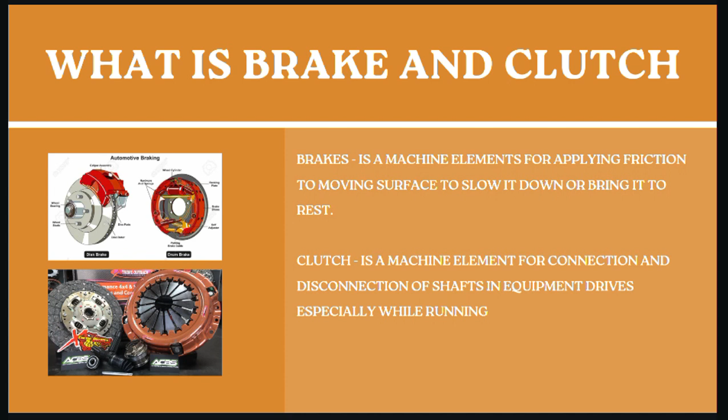Next, types of brakes. We have first mechanical brakes, including band brake, differential brake, block brake, brake shoe, disc brake, and spot brake. Then hydrodynamic brake, and lastly electric brake.

So what is band brake? Band brake uses a flexible band on a rotating drum to slow or to stop motion.

Next is differential brake. This brake allows control of left and right brakes, usually used in aircrafts.

Next is block brake. This brake is a type of friction brake that uses a brake shoe.

Next is disc brakes. From the word disc brakes, it uses a disc to stop the motion of the machines. Then next is hydrodynamic brake.

This brake uses the resistance of fluid to slow down the machines. So it uses a fluid to stop the machines.

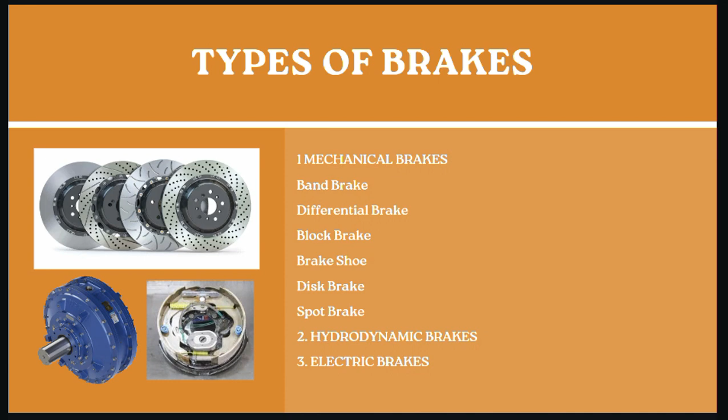Then next is electric brake. It uses electrical current or a magnetic force to slow down and to stop.

What is the advantage and disadvantage of using brakes? Advantages: simple in construction and maintenance, less expensive compared to hydraulic brake, and good for emergency and parking brakes. Disadvantages: wear and tear, heat buildup, and maintenance costs.

So the advantage of this is, of course, to stop or slow down the machines. And this is also a safety feature in case there's an accident or malfunction of a machine.

Then the disadvantage is wear and tear. This machine element has friction, that's why there's friction in brakes, and that's why there's wear and tear. So through time, the brake pads will wear down, so that needs a replacement.

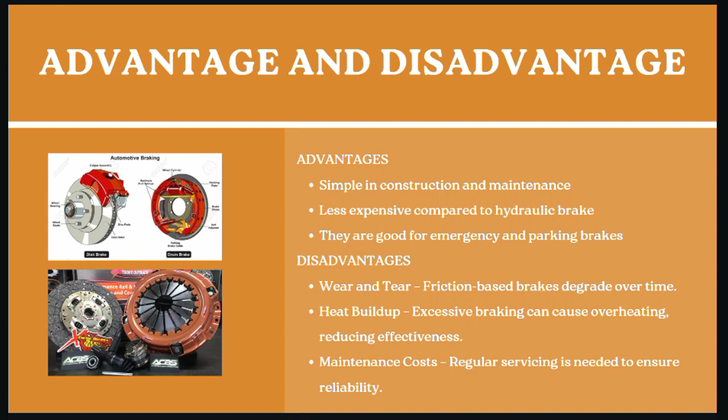So next is maintenance cost. Every brake has maintenance to ensure safety and to ensure also that it will work in case of emergency.

Types of clutches. First we have friction clutch, containing disc clutch, cone clutch, band clutch, block clutch, centrifugal clutch, and expanding ring clutch. Then next is jaw clutch, hydraulic clutch, and electromagnetic clutch.

First, disc clutch, cone clutch, band clutch, block clutch, and centrifugal clutch use friction to transmit or translate movement at a wheel.

So usually it depends on what component it is. For example, in disc clutch it uses a disc, and in cone clutch it uses conical shape clutches.

Then in block clutch, it uses interlocking blocks to transmit torque in a shaft.

Then the band clutch uses a flexible band to transmit torque in a shaft.

So next is centrifugal clutch. This clutch is a mechanical device used on driven rotary equipment, so usually it is used in combustion engines. So sometimes it uses centrifugal clutch.

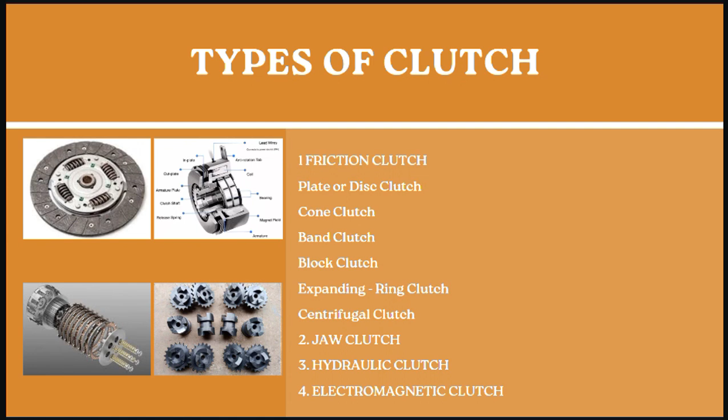Then next is electromagnetic clutch. Electromagnetic clutch uses electric current or electromagnetic force to function. So yeah, that's electromagnetic clutch.

What is the advantage and disadvantage? For the advantage: precise control over acceleration and power, better fuel efficiency compared to automatic transmission, and lower maintenance costs due to simpler mechanics. The disadvantage is it requires practice to operate smoothly, can be tiring in heavy traffic, and prone to wear if not used properly.

So using clutch has the advantage of precise control over acceleration. So using clutches, we can maximize the power of a machine.

And if properly used, the clutch can lower the maintenance cost and provide fuel efficiency compared to automatic transmission.

Then the disadvantage is it requires practice to operate smoothly, because using a manual gear is hard. You need proper balance of clutch and gas to accelerate the car smoothly.

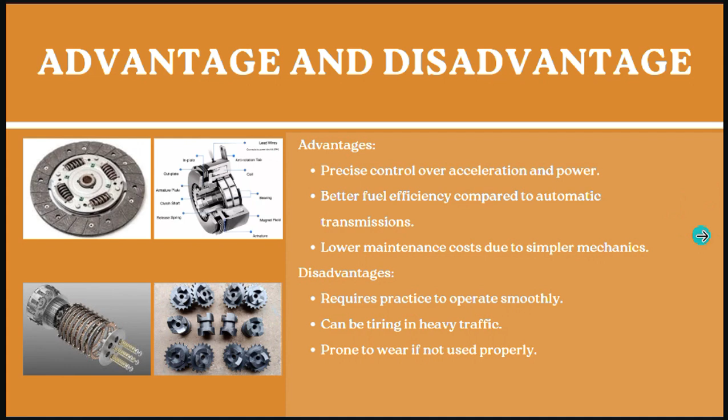Formula of clutch in plate or disc clutch. First is total torque in pressure disc. Torque equals number of pairs multiplied to coefficient of friction multiplied to applied force, then multiplied to frictional radius.

Then next is torque equals to number of pairs multiply to coefficient of friction multiply to applied force, then multiply to 2 over 3 times outside radius raised to 3 minus inside radius raised to 3, over outside radius raised to 2 minus inside radius raised to 2.

Then next is total applied force. Force equals to pi multiplied to pressure times outside radius squared minus inside radius squared.

Then next is total torque in wear disc. Torque equals to number of pairs multiplied to coefficient of friction times P max times outside radius raised to 2 minus inside radius squared, times inside radius.

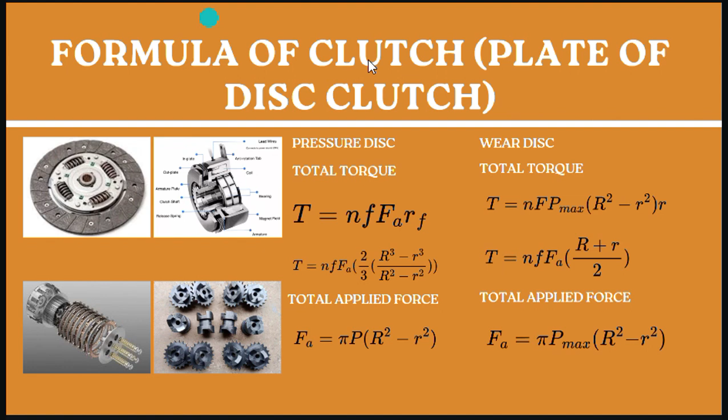Then next is cone clutch. First is torque transmitted. Torque equals to FA, or axial force, times coefficient of friction times friction radius over sine theta.

Next is axial force. FA equals to normal force times sine theta.

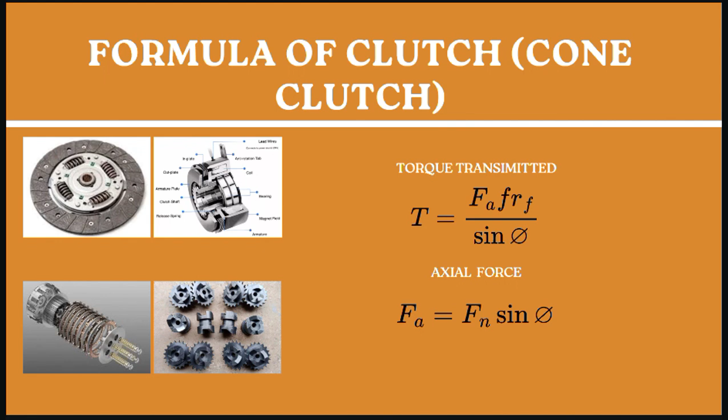So next is band clutch. First is torque transmitted. T equals to F1 minus F2 times D over 2. The D is the drum diameter and F is force.

The next is maximum normal pressure. P max equals to F1 over band width times radius.

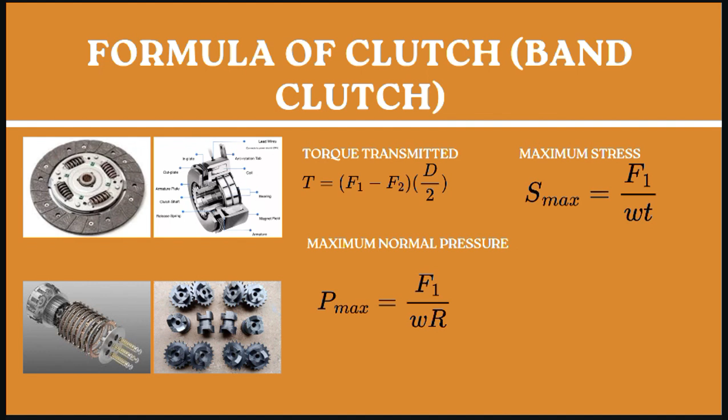Then next is maximum stress. S max equals to force over band width times band thickness.

So next, centrifugal clutch. First, torque transmitted. Torque equals 2 times number of identical weights times radius of friction times coefficient of friction times W, which is weight of each inertia, times radial distance or length times RPM raised to 2,

over 70,400 minus radial spring. Next is radial spring force on each inertial weight. So S equals to W, which is the weight, and L, which is the distance, times RPM raised to 2 over 70,400, cosine times pi over 4 minus pi over n.

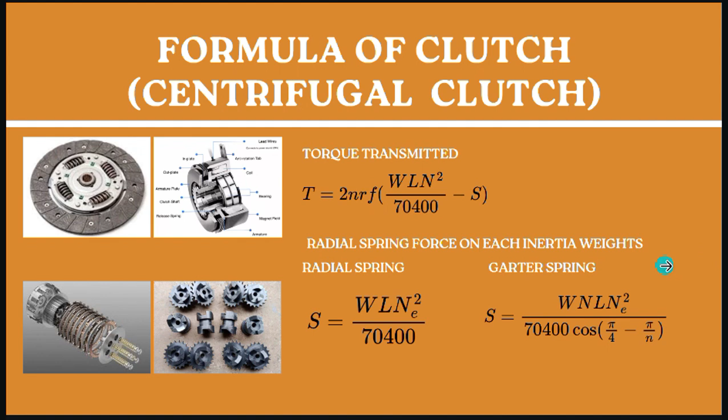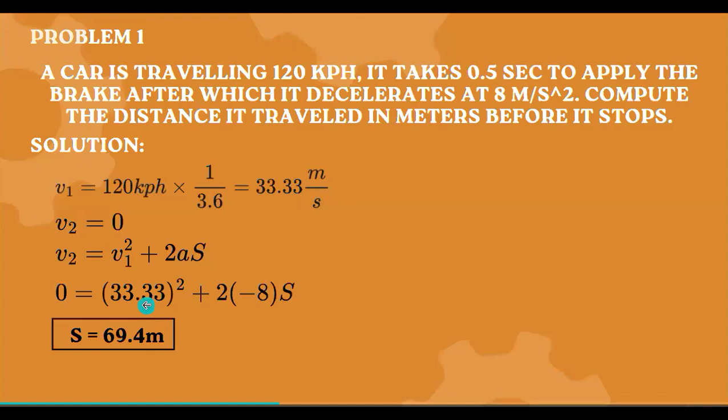We are here to solve problems of clutch and brakes. Problem number one.

A car is traveling 120 kph. It takes 0.5 seconds to apply the brake after which it decelerates at 8 meter per second squared. Compute the distance it traveled in meters before it stopped.

Initial speed equals 120 kph. We convert it to meter per second because we're looking for meters. 120 kph times 1 over 3.6 equals 33.33 meter per second.

Final speed equals to 0 because the car is stopped, and we use final speed squared equals initial speed squared plus 2 times acceleration times distance it traveled.

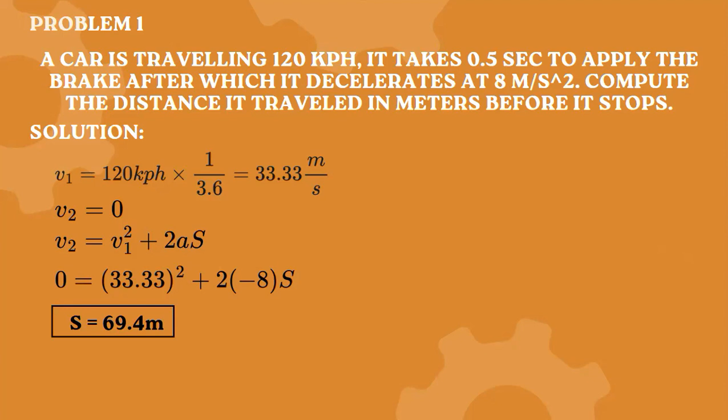Substitute the given: 0 equals 33.33 squared plus 2 times negative 8 times distance traveled. And the answer is 69.4.

Next one is problem number 2. A car is moving at 60 mph when the brakes are suddenly locked and the car begins to skid. If it takes 2 seconds to slow the car to 30 mph, how far will it have traveled in coming to stop?

Initial speed equals to 60 mph. We convert it to feet per second, which is 88 feet per second. And the final speed equals 30 mph equals 44 feet per second.

Acceleration equals final speed minus initial speed over time, equals 44 minus 88 over 2, equals negative 22 feet per second squared.

Again we use final speed squared equals initial speed squared plus 2 times acceleration times distance traveled. Substitute the given: 0 equals 88 squared plus 2 times negative 22 times distance traveled, equals 176 feet. Problem number 3.

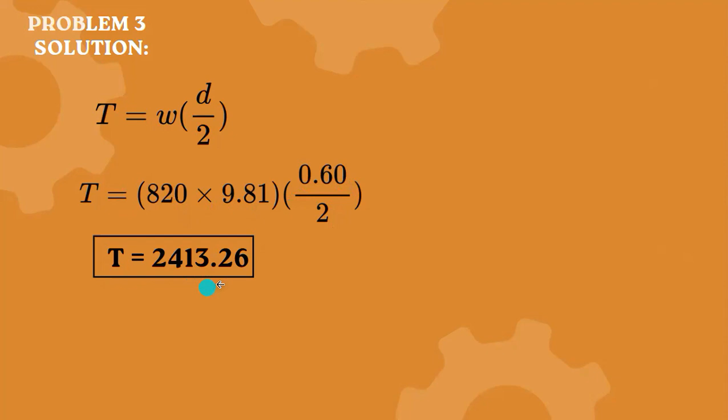We use T equals W times D over 2. T equals 820 times 9.81 times 0.60 over 2. And the torque is 2413.26. Next one, problem number 4.

A simple band brake has a 76 cm drum and fitted with a steel band 2/5 cm thick, lined with a brake lining having a coefficient of friction of 0.25. The arc of contact is 245 degrees and the drum is attached to a 60 cm hoisting drum that sustains a rope load of 820 kilogram. The operating force has a moment arm of 1.50 meters and the band is attached 12 cm from the pivot point. Compute the force required considering the direction of rotation is reversed.

We have the same given as problem number 3, but we're looking for the force required.

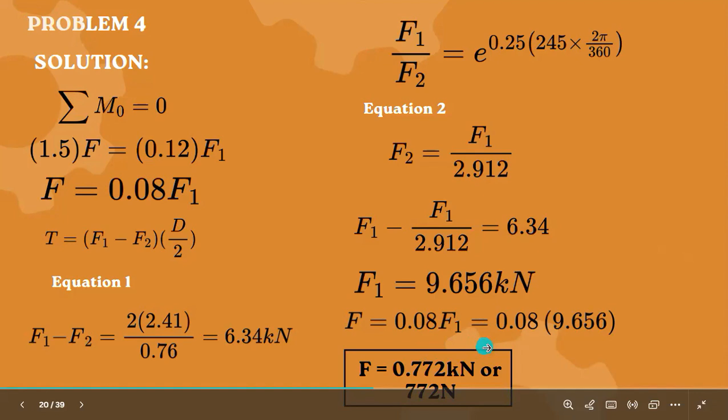And the next one, problem number 5. A simple band brake has a 760 mm drum fitted with a steel band 2/5 cm thick lined with a brake lining having a coefficient of friction of 0.25. The arc of contact is 245 degrees, and the drum is attached to a 600 mm hoisting drum that sustains a rope load of 820 kilogram. The operating force has a moment arm of 1.50 meters and the band is attached 120 mm from the pivot point. Compute the width of the steel band for a tensile stress of 55 MPa.

The solution is: stress equals F1 over Bt. B equals 9.656 times 10 raised to 3 over 55 times 4. The width of the steel band is equals to 43.89 mm.

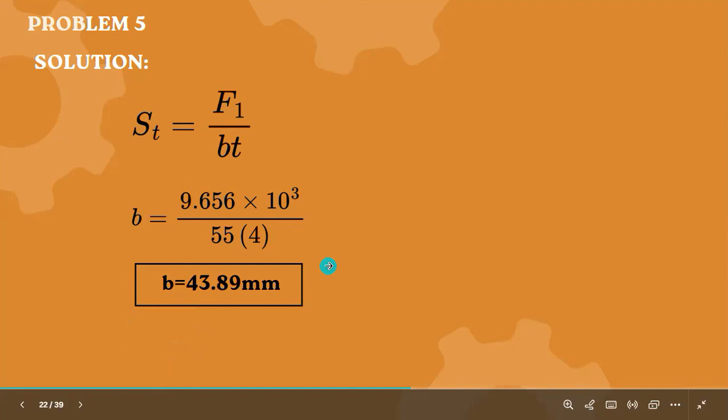We follow the problem of clutch. Problem number 1.

A disc clutch has 6 pairs of contacting friction surfaces. An axial force of 100 pounds acts on the clutch. The shaft speed is 400 RPM. How much horsepower can the clutch transmit if the frictional radius is 2 inches and the coefficient of friction is 0.30?

We solve for torque equals F times F times R times N. 0.30 times 100 times 2 times 6. The torque is 360 inch-pound.

And we solve for horsepower. Power equals 2 pi Tn, and we divide it by 33,000 to convert to horsepower. Power is equal to 2 pi times 360 over 12 times 400 over 33,000. The power is 2.28 horsepower.

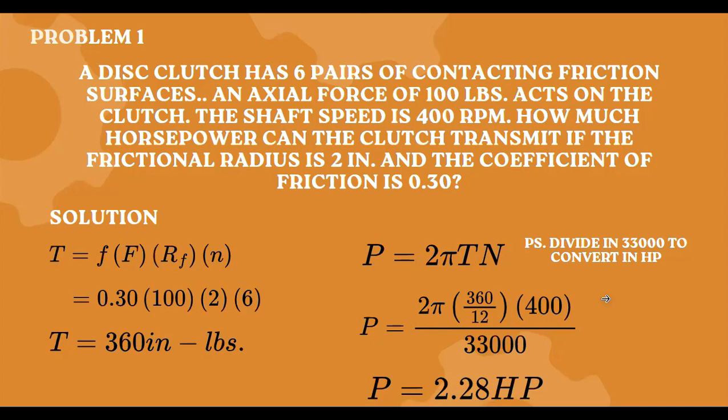Problem number 2. A truck develops 33.5 HP at 1000 RPM. The clutch used to transmit the aforementioned power is a single plate clutch with 2 pairs of contact surfaces. If the coefficient of friction is to be 0.40 and the mean diameter of the disc is to be 190 mm, and the average normal stress on the clutch lining is 120 kPa, compute the inside diameter.

So P equals 60 times P over 2 pi equals F times FA times RF times N. Equals to 0.4. RF equals dm over 2 equals 0.190 over 2 equals 0.095.

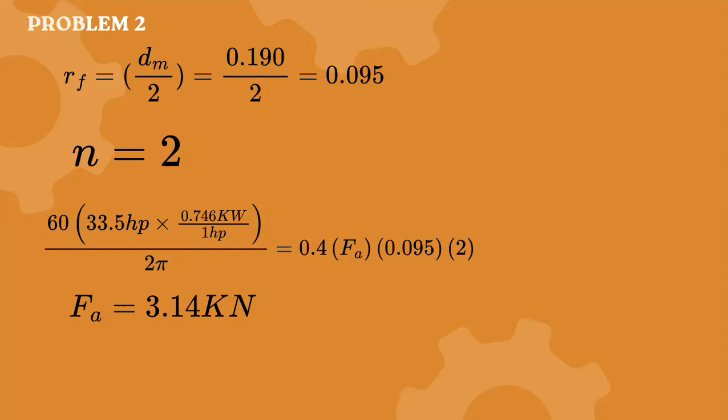N equals 2. And substitute the given: 60 times 33.5 HP times 0.746 kilowatts per 1 HP over 2 pi equals 0.4 times FA times 0.095 times 2 equals 3.14 kilonewton. Problem number 3.

A cone clutch has an angle of 10 degrees and a coefficient of friction of 0.42. Compute the axial force required if the capacity of the clutch is 7 kilowatts at 500 RPM. Note, the mean diameter of the active conical section is 300 mm.

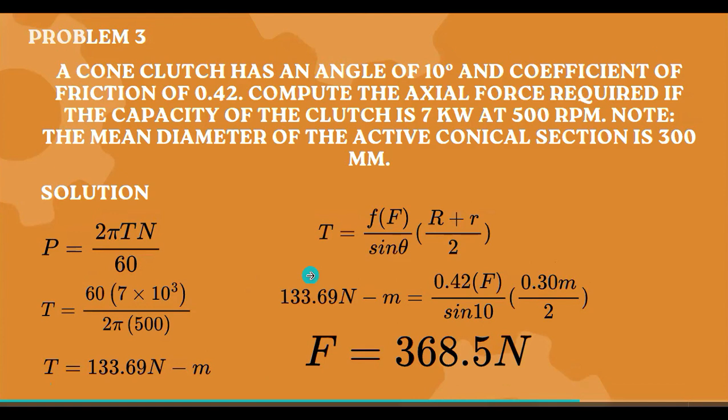Solution. Power equals 2 pi Tn over 60. Torque is equals to 60 times 7 times 10 raised to 3 over 2 pi times 500. Torque is equals to 133.69 Newton meter.

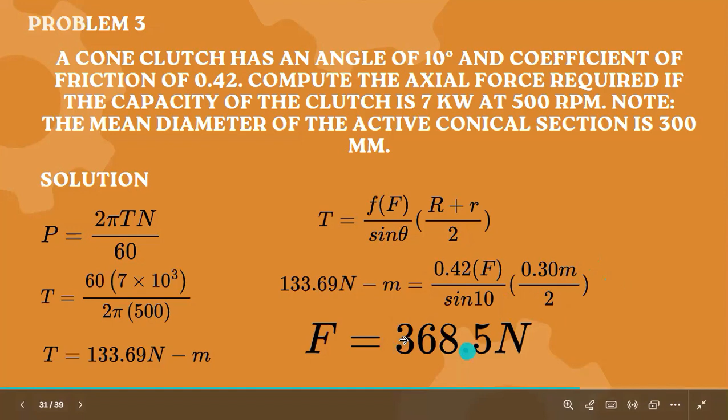And solving for axial force required: torque equals coefficient of friction times F over sine theta times R plus R over 2. 133.69 Newton meter equals 0.42 times F, which is the axial force, over sine 10 times 0.30 meters over 2, equals 368.5 Newton. This is the final answer for problem number 3.

How much torque can a cone clutch transmit if the angle of conical element is 10 degrees? The mean diameter of the conical clutch section is 200 mm and an axial force of 550 Newton is applied. Note, the coefficient of friction between the clutch elements is 0.45.

Solution. We use torque equals coefficient of friction times force over sine theta times R plus R over 2, meaning the radius. Rm equals dm over 2 equals 0.20 over 2 equals 0.10 meters. Torque is equals to 0.45 times 550 Newton over sine 10 times 0.10 meters equals 142.53 Newton meter. This is the final answer.

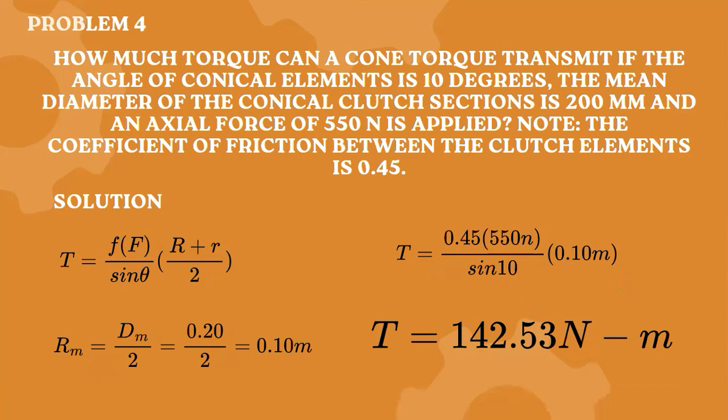Problem number 5. An engine developing 40 HP at 1250 RPM is fitted with a cone clutch built into the flywheel. The cone has a face angle of 12.5 degrees and a maximum diameter of 14 inches. The coefficient of friction is 0.2. The normal pressure on the clutch face is not to exceed 12 psi. Determine the face width required.

Solution. We use torque equals 2 pi p and Rm, p sub m, R sub m squared w. Rm equals R plus R over 2 equals R plus R minus w sine 12.5 over 2 equals R minus 0.1082 w.